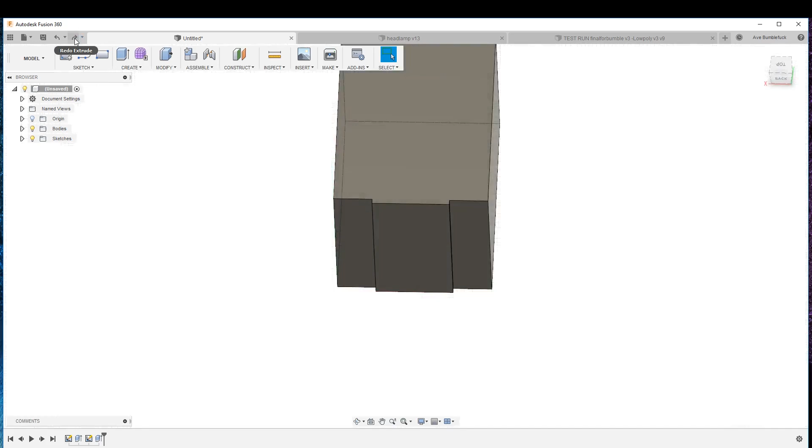Okay, we got to go into the manufacture. There we are. We were in the model space, now we're into the manufacture. So we hit the setup over here. And this is what squares the virtual world with the universe, the real world.

First off, we got to set up our stock. Relative box size ain't no fucking good because there's no relative box size material. You can't go and order relative box size material. So we got 4 by 4 by 5.5.

You want your stock to be as close in the confuser as it is in the real world, because if you got extra material in the real world, the CAM does not know that, and it will plunge, or well, it'll ruin your tools because it comes in hard and fast into what it thinks is air but is actually metal. So bad things happen.

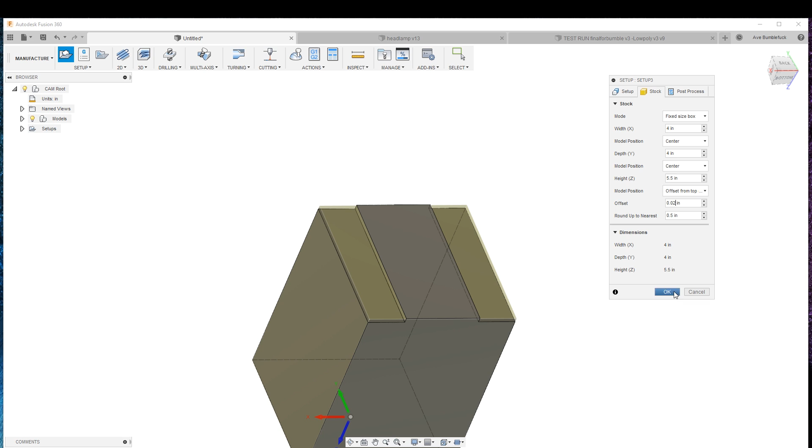So you get the fixed size box. We're going to offset that on the Z height by a little bit, so offset from the top, and that will give us some room to buck off any kind of fugly areas. Never hit OK until you're OK. You got to move around here in the tabs. We start off on the stock.

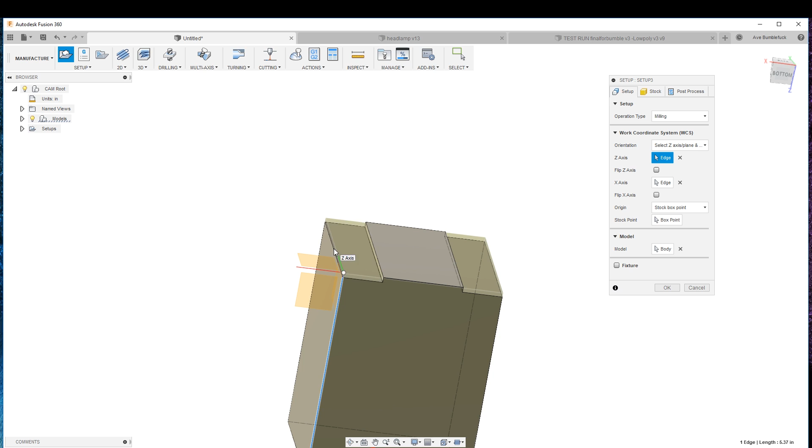We're milling. Model orientation, we want to change that because we don't want the confuser telling us what to do. We want to tell it what to do. So we select our Z axis. I'm going to do that one as an X axis. And then stock point, we want to come over here. Now that Z is going the wrong direction.

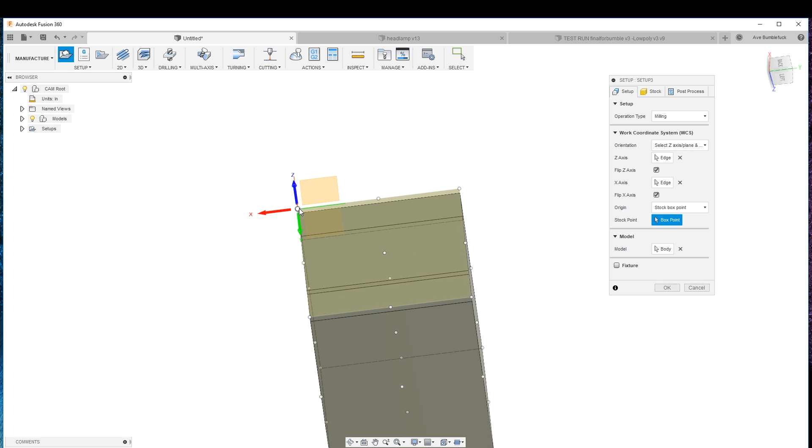And now let's have a look at that. Now the X is going the wrong direction. And then it moves it. And now we are completely cattywampus. That's not right. We'll get there. Is that right? That's right. You know what tells me it's right? I made a little drawing of this and it's on a Post-it note right beside the monitor. So as long as you keep this point the same every time, you're going to be okay.

Now in the post process, we'll give this a name, 0069, for obvious reasons. A meal with a view. This is the stock prep, 4 by 4, and G54 is the work offset.

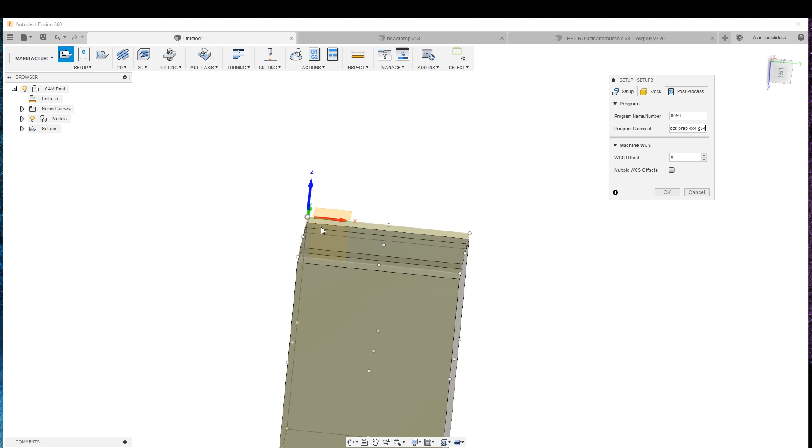This work offset 0, that means G54. Therefore, work offset 1 would be, you guessed it, G54. Work offset 2 is G55. That's just where, when you probe this in, it hides all those variables in the control under G54. You can pull that up in any program and it'll know you're referencing this point. Okay, that's all there is to it.